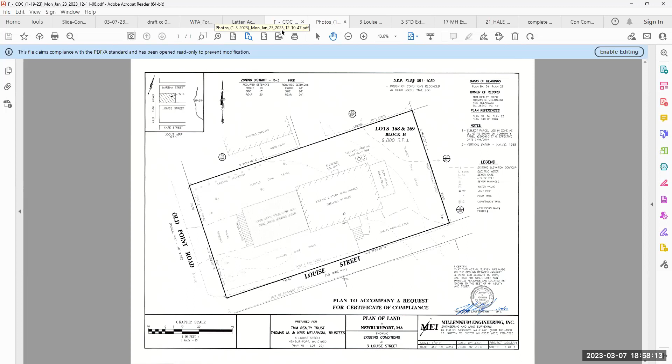So we're applying for a certificate of compliance here for them, and we believe we've brought in all the pertinent information for the board to look at and review. In my personal and professional opinion, I believe they've gone above and beyond what was probably expected, but that's your decision. I was very impressed with what they did when I visited the site and saw the property, and the photos I submitted show that clearly.

So we'd like to address any questions the board has, or concerns or comments that were not addressed. Can you scroll down the photos, Julie? You can see, just to point out, this is the open metal grate ramp into the garage. Can't see under it from that angle, but they had proposed...

Oh, those are plum bushes, right? Yeah, where they planted some plum bushes. Yeah, they're just in the growth stage now, growing.

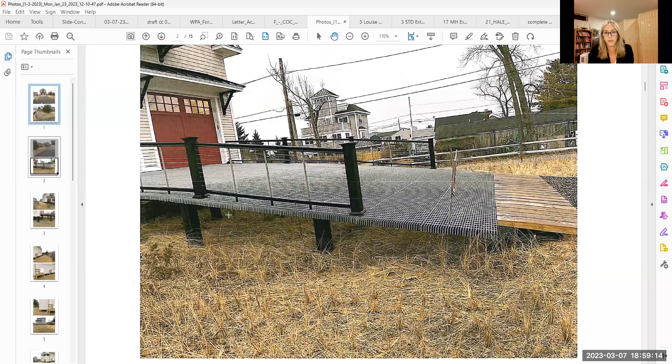So the key was that they needed to have vegetation growing underneath this ramp in order to satisfy the requirements under the ordinance for vegetated area. They needed 35% of the area underneath the ramp to be vegetated in order to meet the requirement. And as you can see, it's pretty much 100% vegetated under there.

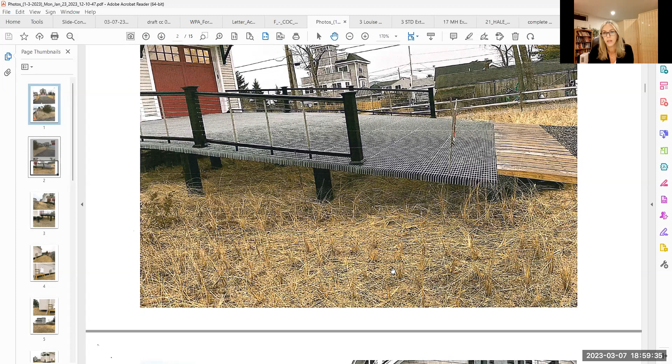It was almost an experiment to use this kind of situation to get into the garage, but it worked extremely well because the water and light can get through and everything is taken in underneath there really well. Yeah, water and light can get through there, so that's a good thing to see. Yeah, I didn't remember there was a grate ramp, but it is a great ramp for this sort of situation.

Thank you. Yeah. Yeah, it all looks good. Yeah, the tanks are elevated. Tanks are elevated.

So this project came out really well, I think, having seen the site. Basically every area of the property is vegetated outside of the driveway. And then there's an additional parking area, noted in the letter from the engineer, that the driveway off of Louise Street is gravel and larger than shown on plan. And that's true.

They proposed a small 8-foot wide driveway area right here off of Louise Street. Here's the ramp going into the garage, but then there was a pull-off sort of parking area that was proposed over here, and they made it larger. So as you can see, this area was added to allow for the parking of another car.

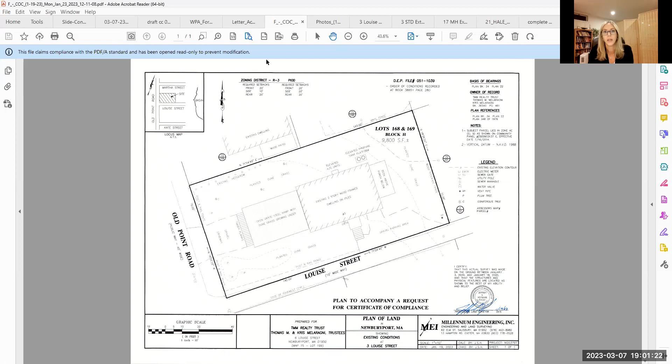Tom Millerani went back and redid all the calculations to make sure there was still enough vegetated area on site, given this new expanded parking area, and they are still significantly above the required amount and the proposed amount of vegetated area on site, even with this added gravel parking area, which is shown right here.

Okay. Does the commission have any questions? Steve, can we hear you? I don't know, can you? Yes, yeah, I can. We can. Yeah, I can hear you. That's really good. All right.

So do we have anything else? I'll accept the motion. From anybody but me? Oh, come on, folks, somebody. Well, I'll make a motion, but I'm not sure what the motion is since I missed the first part of this. Oh, okay. I'll accept the motion to issue a complete COC on this property.

So moved. Second. All right, roll call. Charlie Lovisetti, yes. Steve Moore, yes. Carol Wagon, yes. Bill Mullen, yes. And I vote yes. All right, thank you. Thank you. Yep, thank you, have a good night. You too.

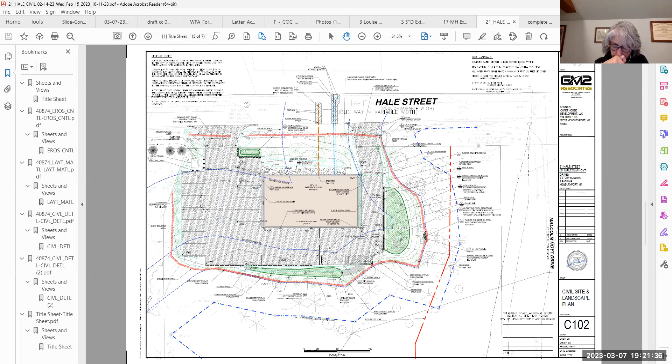But there's only a handful of parcels in Newburyport that somebody could even try to carve chunks out of. I think you just don't want to set a precedent that would allow somebody to play a game, which is why we've asked for the variance, why we've got a proposal in front of you to give the city a good sized chunk of land, and why we engaged you early on to discuss this before we even applied. So hopefully that answers that question, but I think giving you those numbers is a fair thing. We tried to only portray the numbers in the light of how they fit within the regs as it pertained to the overall parcel, because that's the way the regulatory analysis kind of laid out.

But I think to be able to think about the other numbers makes sense. Okay. That work for you, Bill? Yeah, I got a couple other questions as well.

I guess you'll be up in the hardscape numbers due to the second access as well, of course. Yeah, I believe so. I don't think it makes a huge difference, but we'll be giving you a complete update prior to the next meeting with the updated plans. I'll update all the numbers in the NOI narrative, and give it to you in red line strikeout so that you can see what changed with the fire department access.

Okay, and is there a reason that has to be bituminous pavement versus gravel? I think that there's a number of different issues. One is if it's gravel, it needs ongoing maintenance and you're going to have vehicles coming and going. I think because of its use, bituminous makes the most sense, given the amount of use and where it would have it.

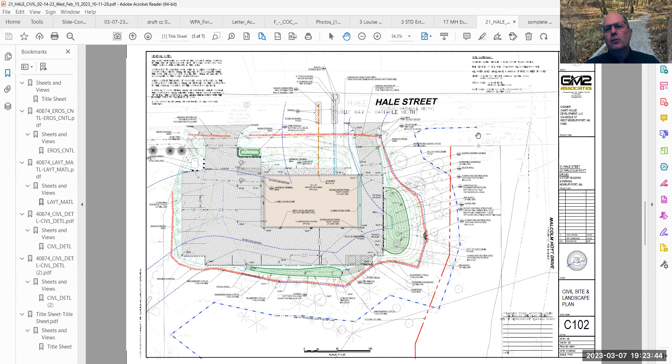Could we consider other options? I don't know if the planning board has a requirement for pavement or not. That's something I'm not usually a planning board type person for. But the other thing to keep in mind is this is still an extremely small development. Julie, can you flip to one of the plans that shows the whole parcel? You're looking at an industrial park plan that is on a 20 scale, which you're not typically used to seeing. Normally you're getting about a 30, 40, or 50 scale because the buildings are so big.

What we're talking about is not a very huge development, so it's not an awful lot of pavement. We are collecting all that water, treating it, and it's all going into a stormwater wetland. The stormwater wetland itself is probably one of the most ecologically friendly ways of handling the stormwater. It's vegetated as a wetland and provides really good treatment.

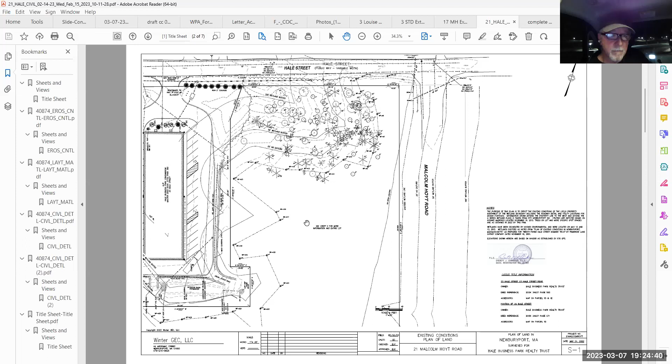Okay, if you can see the building on the left. Yeah, I know, so we're talking like a third of that in terms of size. It's a much smaller development. I thought there was one there that showed the whole thing, but...

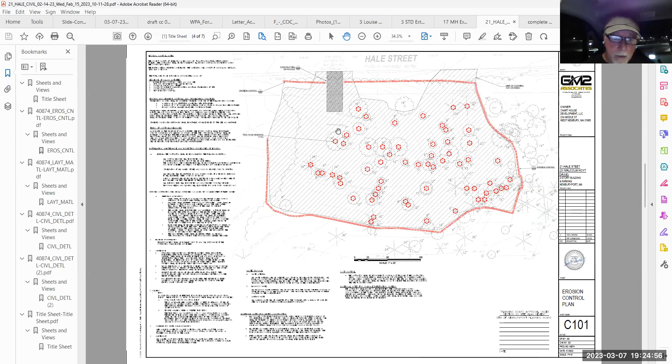Just one additional comment. This is not an objection or anything else, but it looks like maybe 70 or 80% of that lot A4 is already a wetland. So the only development potential it has is just in that sliver in the northwest, that little part in the northwest portion of that site, not where the hand is. Yeah, down there. Yeah.

And I think we showed in the first hearing how that is connected to upland on the adjacent parcel. So if we didn't do a development and provide the city with this land, the only other potential use would be if it were sold to the adjacent property, and then they would be able to go in there. Obviously they have to meet all the performance standards and everything, but the wetland between that and Malcolm Hoyt doesn't protect that area from development. But it's a beautiful little upland area.

Not entirely little. I think it's bigger than the building site we're looking at up along Hale. And during the site walk, we kind of saw it's a really nice spot. What we'll be doing is creating, prior to transfer, a mowed path with a way to cross the stream for the city, if they choose to continue to mow it, to mow that path. I think that conceivably could be used for people to go for a walk out there and enjoy it. The wetland is very walkable too. Other than the stream, it's not a wetland that ponds for any serious length of time. It's just during floods and after significant rains where you'll get puddles here and there within the field.

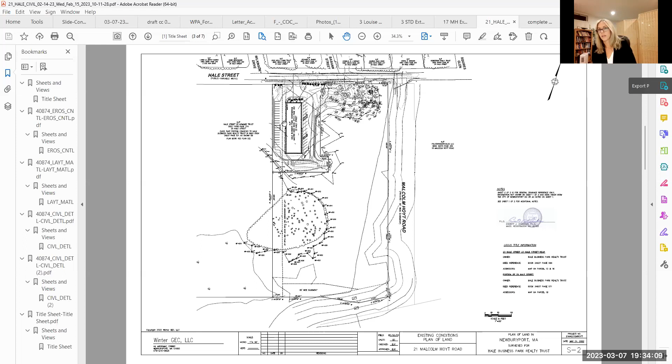I think that makes sense. Okay, so with that, I'll change my request to continue to your first meeting in April. Okay, I'll amend the motion then to continue to April 4th.

Second. All right, roll call: Charlie Lovisetti - yes. Steve Moore - yes. Carol Wagon - yes. Bill Mullen - yes. And I vote yes. Thank you so much. Take care.

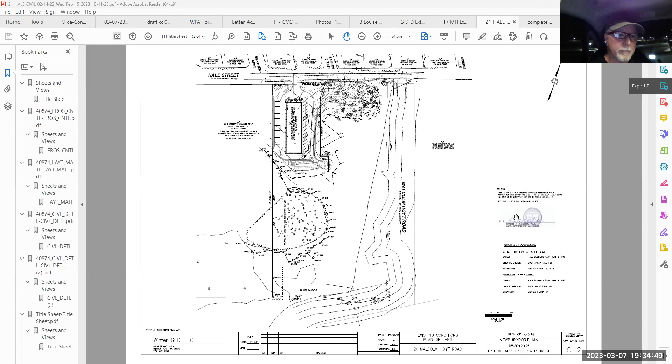All right, can I get a motion to close the public hearings? So moved. Second. Roll call: Charlie Lovisetti - yes. Steve Moore - yes. Carol Wagon - yes. Bill Mullen - yes. I vote yes.

All right, do we have anything else this evening we'd like to discuss? One quick item under old business - I don't know if any of you got my email earlier this afternoon. It was a little late, but we had talked at the last meeting about a letter of support for the CPC grant application associated with Colby Farm Lane Meadow.

It's for improvements at the meadow: removal and replacement of that awful dilapidated split rail fence, putting up some signs, or a sign at the trailhead, and a kiosk with information about the site and habitat, etc. And then also identification of a location for, and construction of, a new public access trail that would go in and around this open space. So I drafted this letter.

Okay. Looks good to me. And you guys all know what's going on, yes? So I'm going to make Steve explain it to you. Me here on the committee? Yeah, but you're one of the promoters, man.

Yeah, there's a - what was it - $51,000 request for CPC to work on various things there, including taking down and putting up a new fence. Yeah, the biggest thing is taking that old rotten fence down and putting up a new one, but just a single one along Low Street, not the corral like it is now.